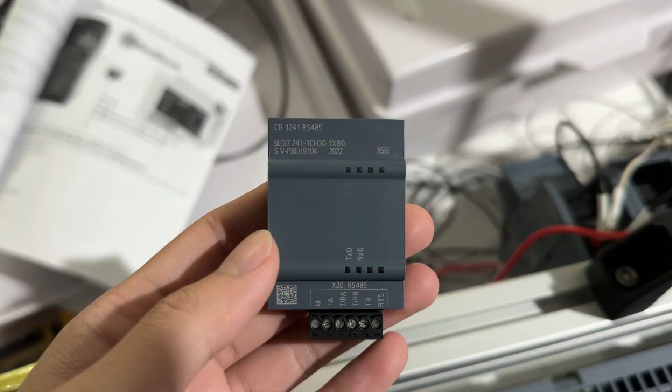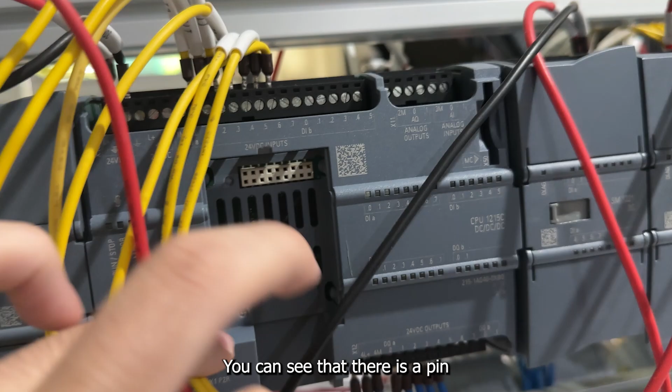Okay, so the first thing you're gonna need to do is to set up an RS-485 card into your PLC. You can see that there is a pin in your PLC and your card that can be connected. So we have to be careful not to block this pin. So let's carefully put it in here and push it in right here. After that, this is done, so you can just go ahead and open the breaker.

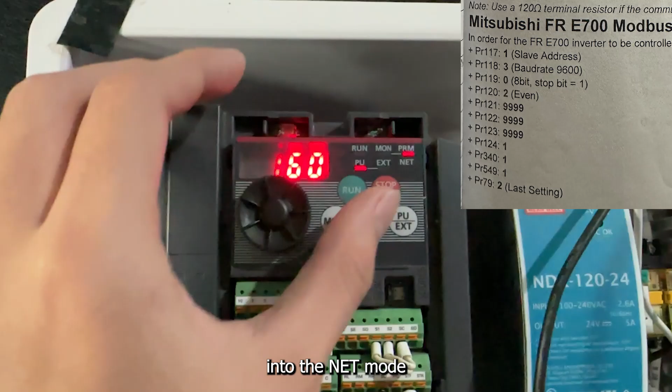Okay, so the next thing that you need to do is to set the inverter into net mode to control it with RS-485. So follow along. I have already put the instructions in the top right corner.

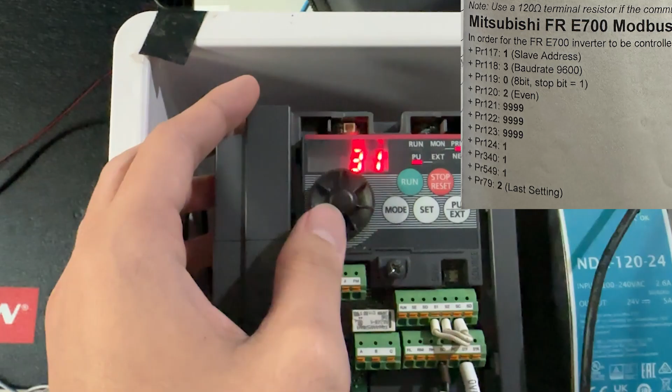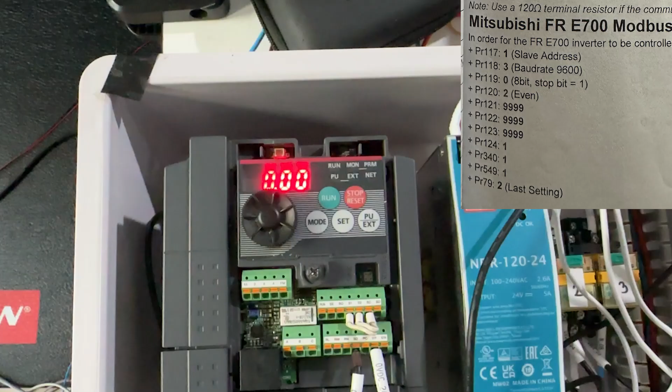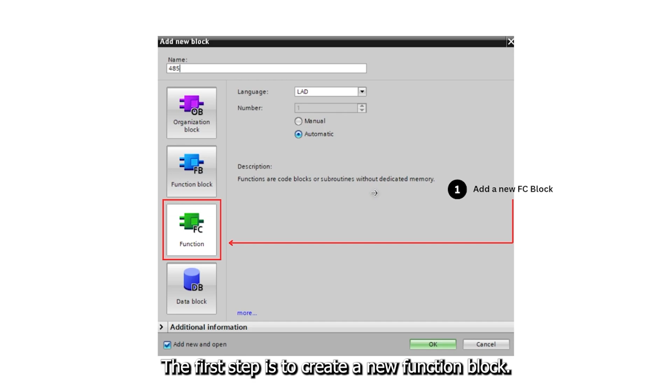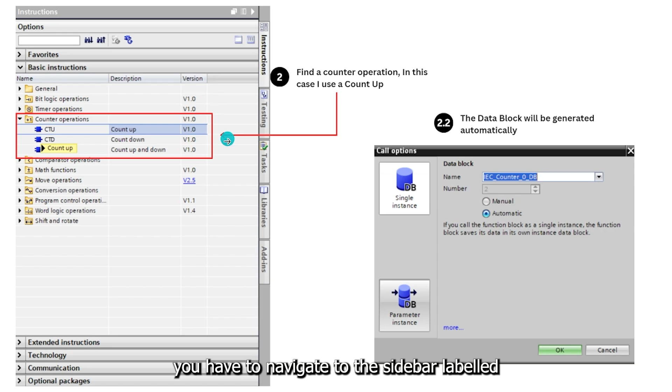Next, we are going to get back to the program. The first step is to create a new function block in your PLC programming environment. A function block is a reusable programming structure that simplifies complex tasks by encapsulating the logic. After you create the function block, you have to navigate to the sidebar labeled basic instructions right here.

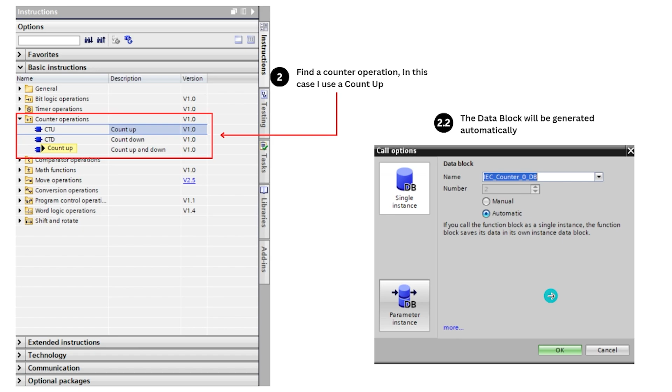Locate and select a counter operation box. In this example, we will use a count up or CTU block. After placing the counter block, a corresponding data block will be automatically generated. Rename the data block as needed or click OK to accept the default name.

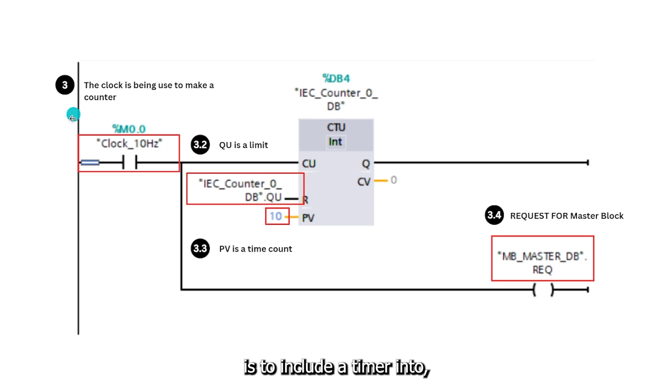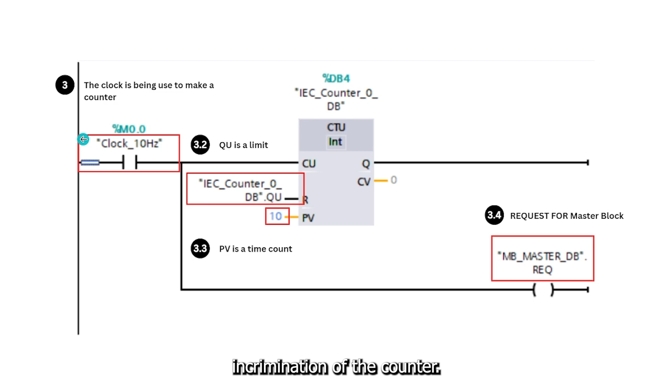Next we're going to include a timer to act as a clock source for the counter. The timer ensures consistent and periodic incrementation of the counter. So first, place the timer in our program and connect the timer output to the counter input to control the counting interval.

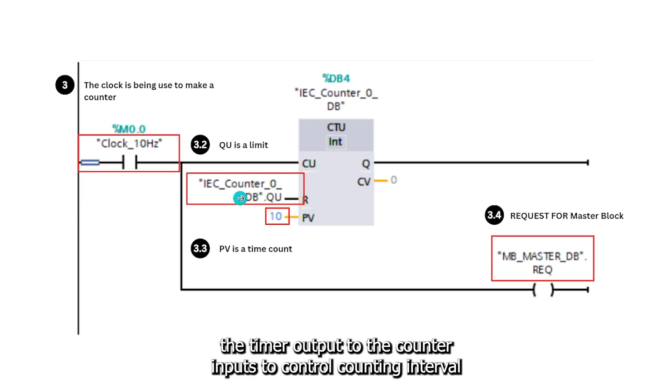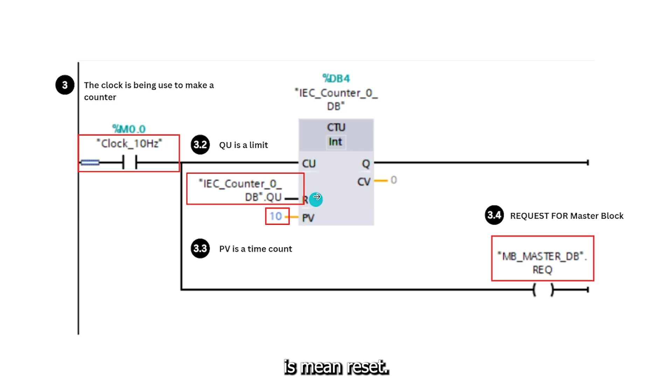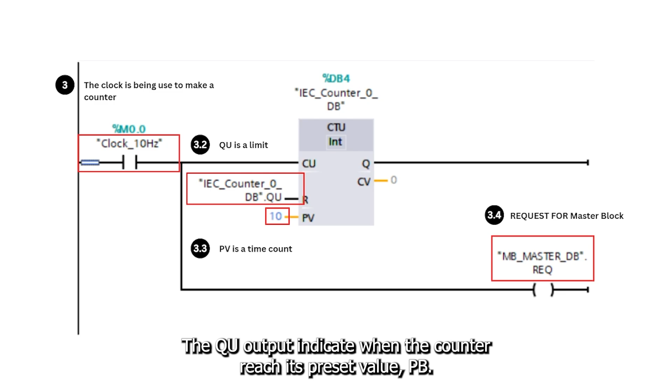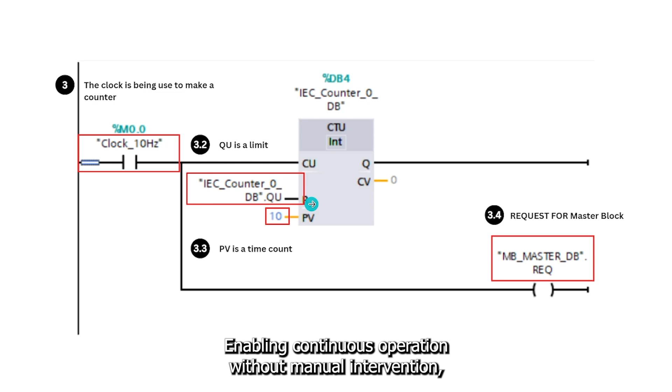Next, we're gonna configure the counter inputs and outputs. R input means reset. Use the QU counter output to reset the counter. The QU output indicates when the counter reaches its preset value PV. Why do we use QU? QU ensures that the counter resets automatically when it completes a count cycle, enabling continuous operation without manual intervention.

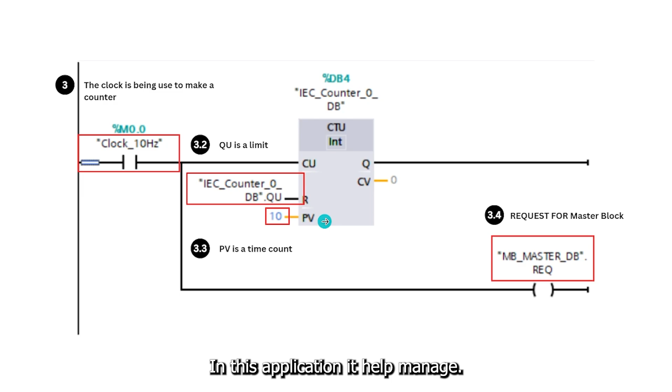PV is the preset value. The PV defines the maximum count before the counter resets. In this application, it helps manage RS-485 communication by preventing simultaneous read operations, which could cause data collisions.

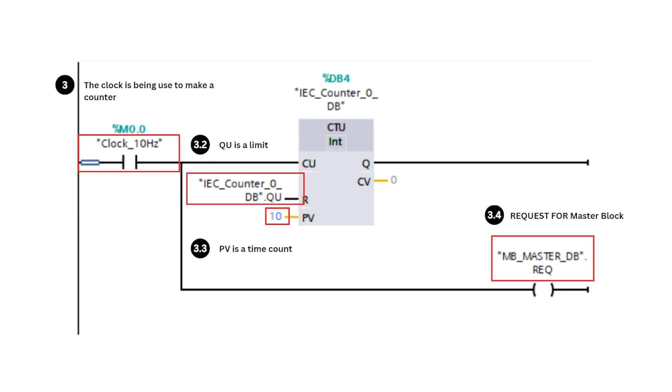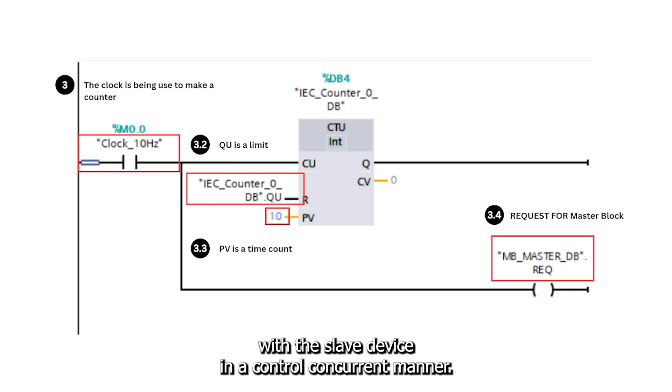And the output. The counter output is used to generate a master request signal. Why do we need the master request signal? The master request ensures that the master initiates communication with the slave device in a controlled manner, avoiding conflicts in data exchange.

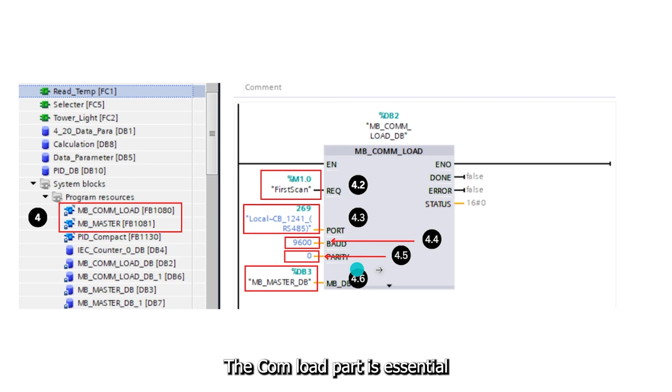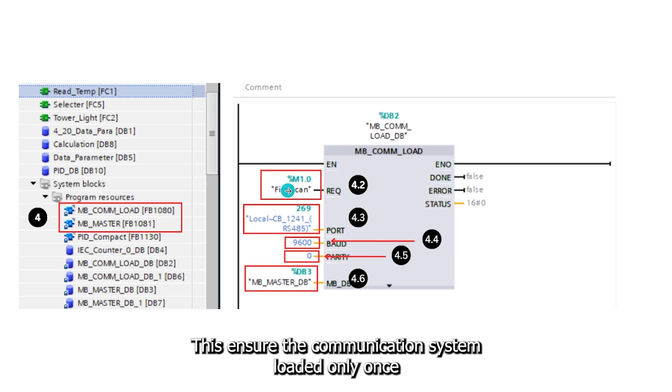The MB_COMM_LOAD box is essential for initializing and configuring the communication settings. It loads the communication parameters required for RS-485 operation. Connect the first scan signal to the MB_COMM_LOAD box. This ensures the communication settings are loaded only once during the PLC startup sequence.

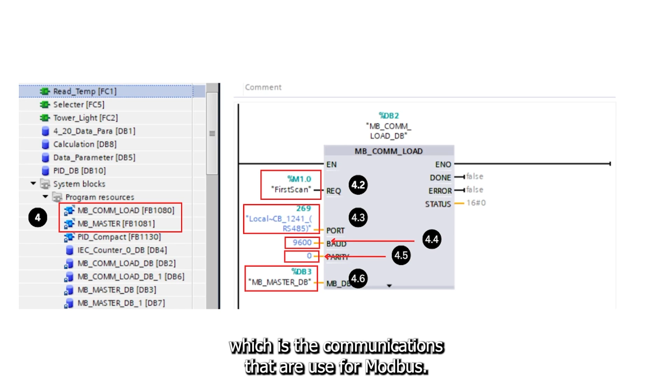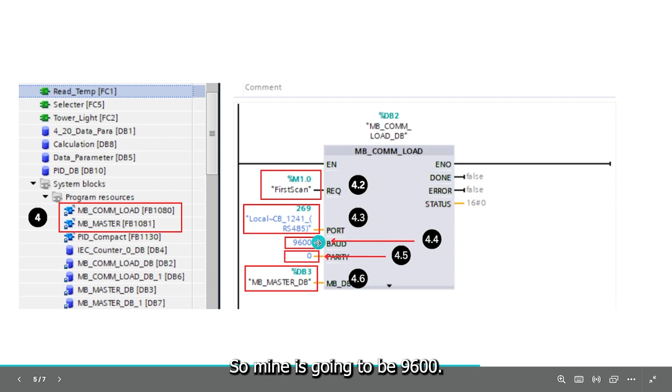The RS-485 communication settings. The port is going to be set to RS-485, which is the communication standard used for Modbus. Baud rate determines the speed of data transmission. Common values are 9,600, 19,200, or so bits per second. Choose a value compatible with all devices in the network. Mine is going to be 9,600.

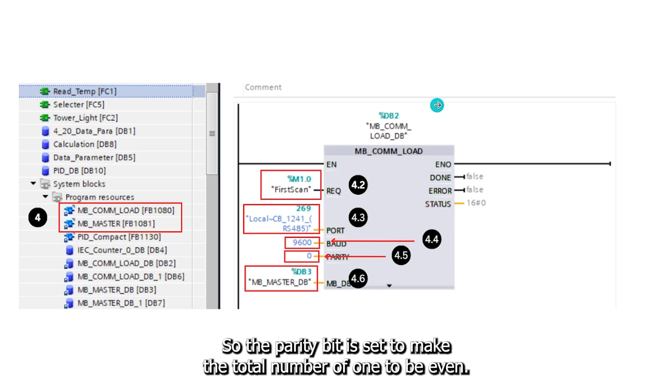Next is the parity. Parity ensures data integrity during the transmission. Options include 0 is no parity bit, 1 is odd and 2 is even. The even parity bit is set to make the total number of 1s even. So if we want the parity to be even, you can simply type number 2 into it.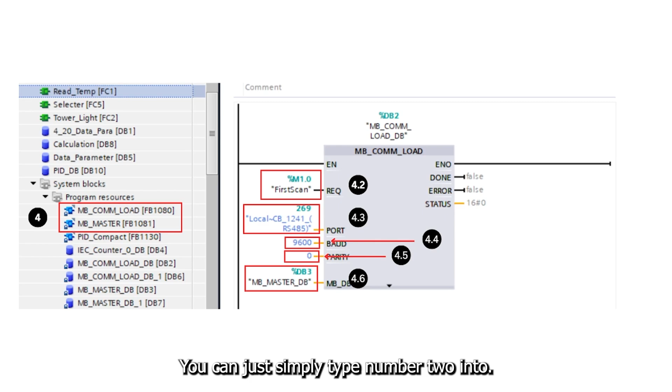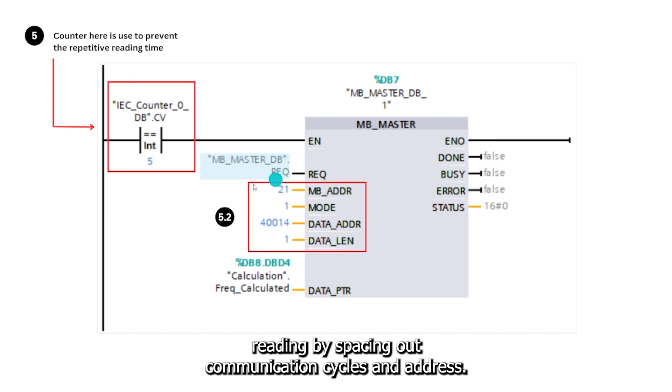Next we're gonna do the master block. The master block is used to send requests and receive data from the slave device. Configure the following. We're gonna need a counter to prevent repetitive reading by spacing out communication cycles. The address specifies the unique ID of the slave device. This ID must match the one configured in the slave settings. I'm going to show you the inverter settings in a minute.

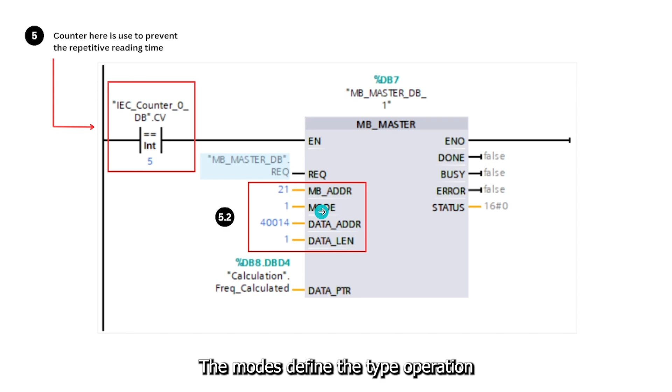Next we're gonna see the mode. The mode defines the type of operation. 0 indicates read only. 1 indicates write only. And 2 indicates both read and write. In this case, it is going to be write only. Next is the data address. The data address indicates the memory location in the slave device to be accessed. Refer to the slave manual for the specific address.

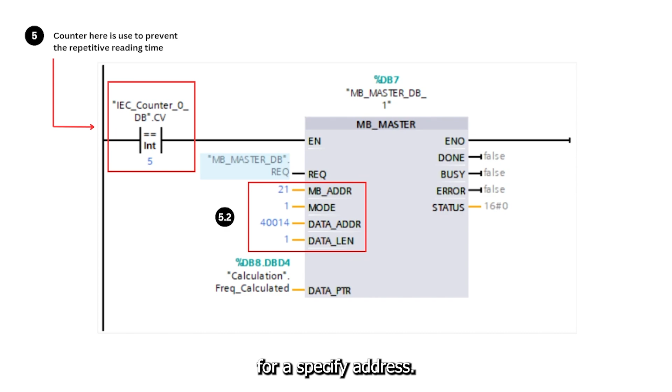So in conclusion, by following these steps, you can set up a reliable Modbus communication system using RS-485. This setup ensures efficient data exchange between master and slave devices while avoiding conflicts and maintaining data integrity. Modbus communication is a robust and versatile protocol that is essential for modern industrial automation. Experiment with different configurations to fully understand its capability.